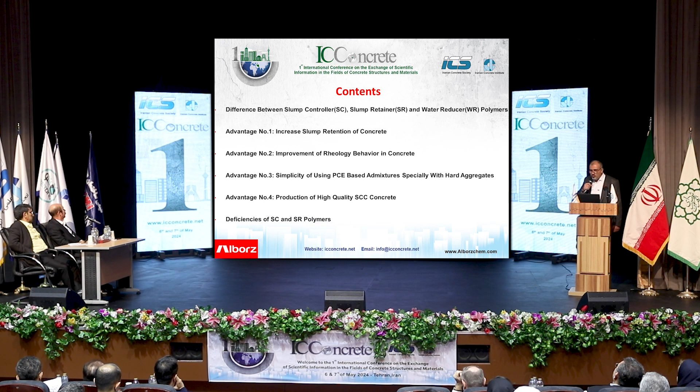Let's look at the contents of this presentation. First, we'll talk about the differences between slump controller, slump retainer, and water reducer polymers. We'll call these two polymers SR polymers from now on. After that, we'll discuss the advantages. Advantage one: increased slump retention of concrete. Advantage two: improvement of rheology behavior in concrete. Advantage three: simplicity of using PCE-based admixtures, especially with hard aggregates. Advantage four: production of high-quality SCC concrete. Finally, we'll talk about the deficiencies of SC and SR polymers and what we can do about them.

Before starting the subject, I would like to introduce our company, Alborz Chemie Asia. So I would like to ask you to watch this video clip.

Now we would like to talk about the differences between a slump controller, slump retainer, and water reducer polymer. First, the difference in dosage and performance of each polymer in concrete. You see from this figure, water reducer polymer has the minimum dosage or highest initial slump, but drastically loses slump over time. A slump controller polymer has a mean value slump, or a slightly higher dosage than water reducer. First you'll see an increase in slump, and after that, loss of slump. So finally, you see a polymer whose performance in slump retention is much better than water reducer polymers. And finally, slump retainer polymers have the maximum dosage or minimum initial slump, but the best performance in slump keeping of concrete.

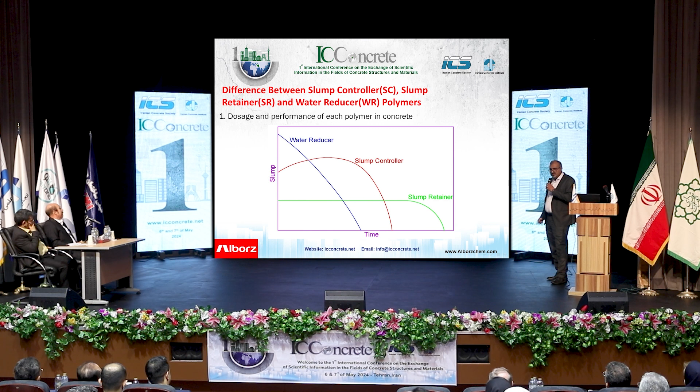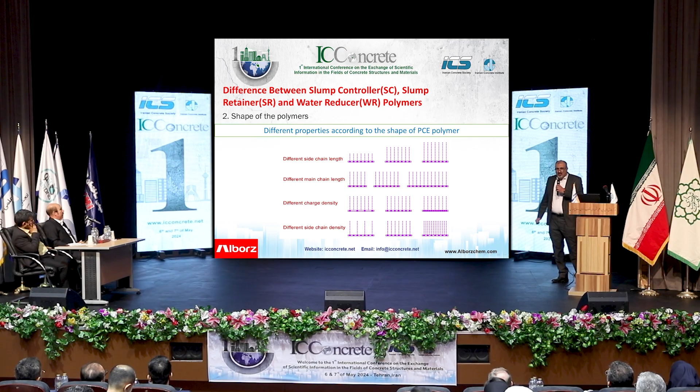Secondly, we'd like to talk about the shape of the polymers. We can give different properties according to the shape of the PCE polymer. PC polymer consists of a main chain and side chains. For example, here you can see different side chain lengths. This polymer, which has the longest side chain, gives the best slump keeping. With different main chain lengths: if you use a polymer with the shortest main chain length, you get the most water reduction rate at the start of concrete production. Here, the same shape but different charge density - the polymer with highest charge density gives the best water reduction at the start. And with different side chain density, the polymer with the highest side chain density gives the best slump keeping. So we can design a PC polymer to give special properties according to the shape of the polymers.

And by this usage, we can produce slump retention and slump controller polymers.

Okay, universal price and availability. About price, you can see there's not much difference between SR and WR polymers. But regarding mean value production amount, you'll see 70% water reducer and 30% slump retention in the world. In the market, you can find WR polymers as mother liquid for PC or PC base. So the most production in the world is water reducer, with 70%. But here, by using the advantages of SR polymers, we would like to encourage you to use more slump retention types.

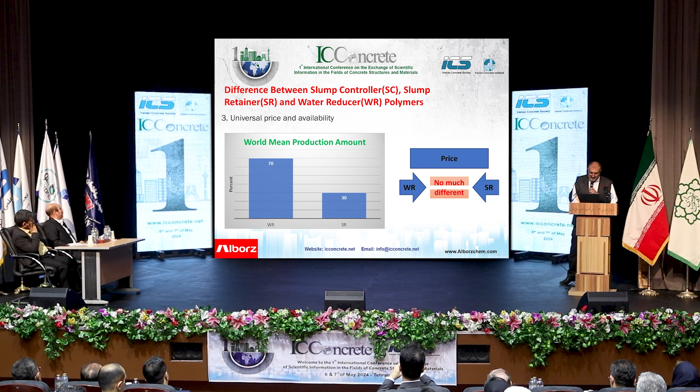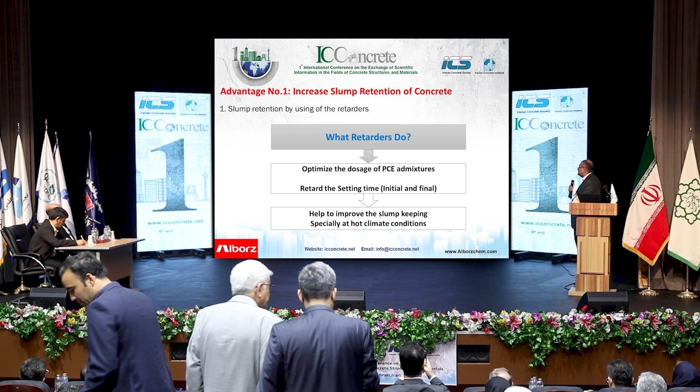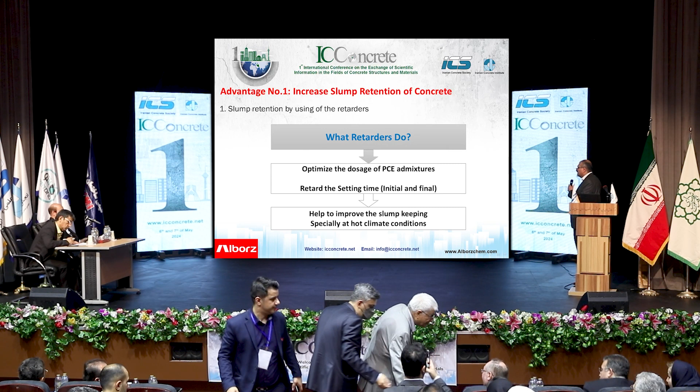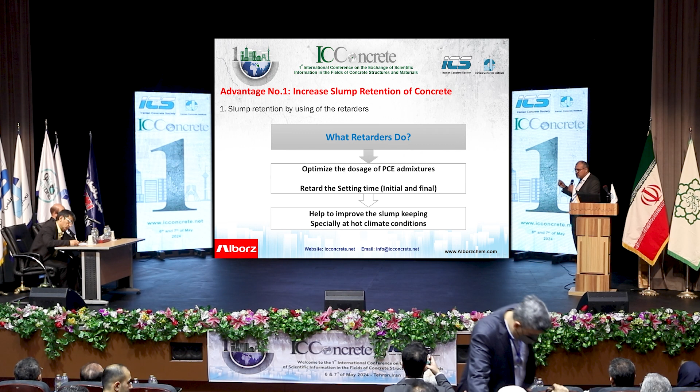Advantage number one: increase slump retention of concrete. First, by using retarders, we can improve the slump retention of concrete. Now, what do retarders do? First, they optimize the dosage of PCE admixture. If you use retarders beside the PC admixture in the formulation of a superplasticizer, you'll see optimization of the dosage of superplasticizer. In fact, you can use a little less pure PC, which could be economical. Also, they retard the setting time, both initial and final, depending on the type of retarder used. So they can help improve slump keeping, especially in hot climate conditions. For hot climate conditions, it is necessary to use retarders in the formulation of PC superplasticizers because we should retard the setting time of concrete to give the best slump retention.

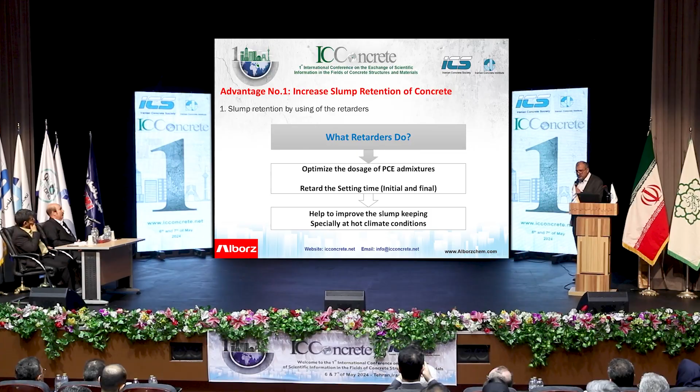But it's not enough. Now let's see what happens when you use retarders in the formulation of admixtures. Here you can see in this figure, we would like to control the initial setting time of cement at 90 minutes.

If the concrete temperature is 20 degrees, there is no need to use retarders to give an initial setting time of 90 minutes. If the concrete temperature rises to 25 degrees, we need 100 grams of pure retarder, not a solution of retarder, to give the initial setting time of 90 minutes. When the concrete temperature increases to 28 degrees, you will need 250 grams of pure retarder, more than 2 times as much.

And finally, if the concrete temperature is 35 degrees, you will need 600 grams of retarder. Now let's see what happens.

If you formulate a PCE admixture with 6% retarder, which is most common in the market, you can find PCE superplasticizers with 4 to 6% retarders, and here we use 6% retarder. So if you need 100 grams of retarder, you should use 1.7 kilograms of superplasticizer in 1 cubic meter of concrete. And finally, if you would like to use 600 grams of retarder, you should use 10 kilograms of PCE superplasticizer in 1 cubic meter of concrete.

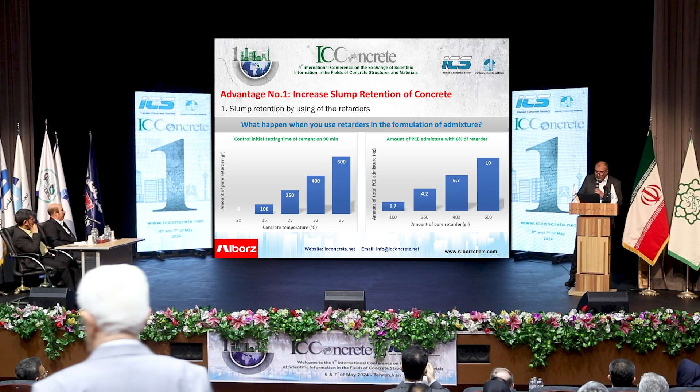So what happens here? If you would like to produce a concrete with a binder content of 450 kilograms per cubic meter and a target slump of 200 millimeters, here's what happens. If you would like to achieve this target slump with only 1.7 kilograms of admixture, you should use an admixture with a total solid content of 50%, with 44% being pure PCE.

And at the end, if you would like to use 10 kilograms of admixture to give a slump of 200 millimeters, you should use an admixture with a total solid content of 20%, with 14% pure PCE.

So when you use this type of admixture in concrete, you will put too much retarder in the concrete. So this type of admixture should be good for hot climate conditions, like the countries near the Persian Gulf, with hot and humid climate conditions.

And here, if you use this type of admixture, you will put a little amount of retarder in the concrete, and this type of admixture should be good for cold climate conditions. For countries like Iran, with hot summer and cold winter, maybe it is better to use these types of admixtures. So the formulation of admixture and the use of retarders depends on the project conditions and especially on climate conditions.

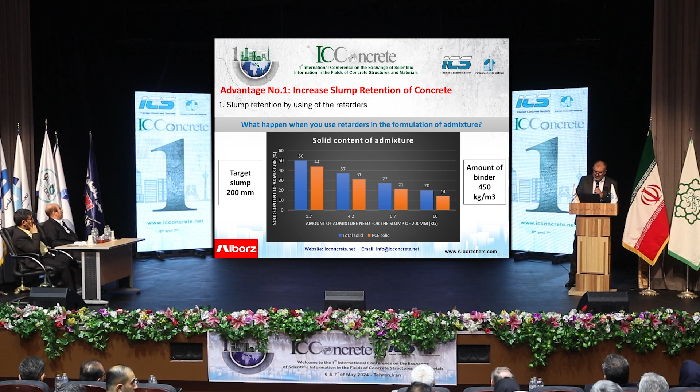And now we would like to improve slump retention by using these polymers. Here we don't use any retarder. If you formulate a PCE admixture and substitute about 50% of the water reducer polymer with SC and SR polymers, you can see here the sample admixture.

If you use only water reducer, after 45 minutes you will give a slump of about 80 millimeters. You cannot use this kind of concrete. But if you use this formulation, after 45 minutes the slump will be about 150. The concrete is usable.

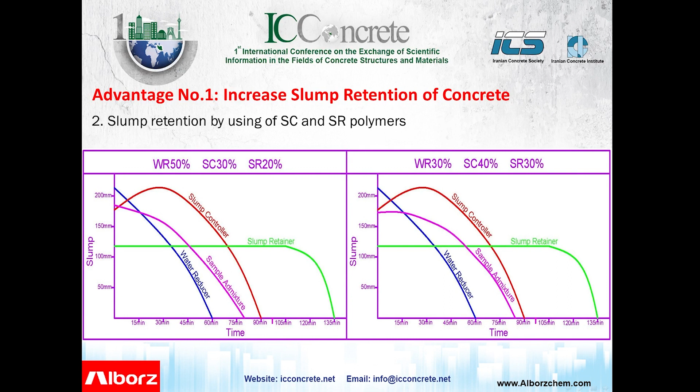And if you substitute more, about 70% of the formulation with SC and SR polymers, it is much better. After 45 minutes, you will get a slump of 170 without using any retarder. So using SC and SR polymers will improve slump retention much better than using retarders.

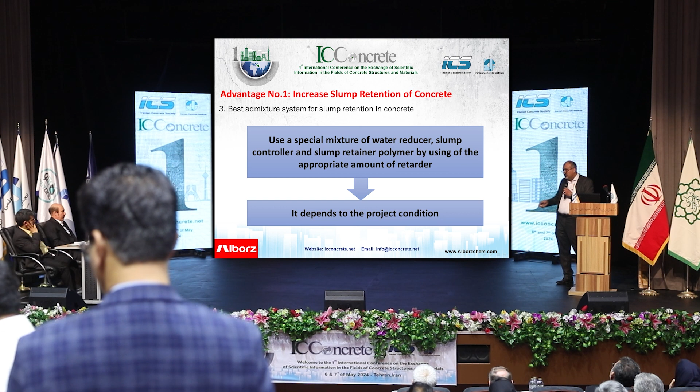And the best approach is to use a special mixture of water reducer, slump controller, and slump retainer polymer, with the appropriate amount of retarder. You should use retarders in the formulation of your admixture even at cold climate conditions. It depends on the project and climate conditions.

Now here you can see a video clip comparing two types of admixture produced by Alborz Chimie company. First, SRJ, which contains SR polymers, and second, HF, which contains water reducer plus retarder. You can see the performance of these two admixtures in concrete.

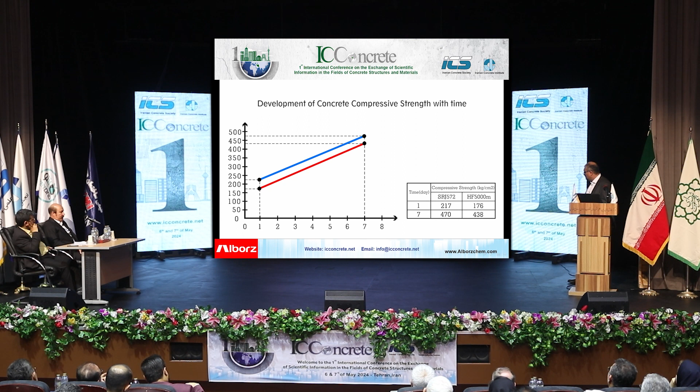Okay, now advantage number 2: improve the moving ability of concrete, as you saw in the clip. The best moving ability was for SRJ, which contains SR polymer.

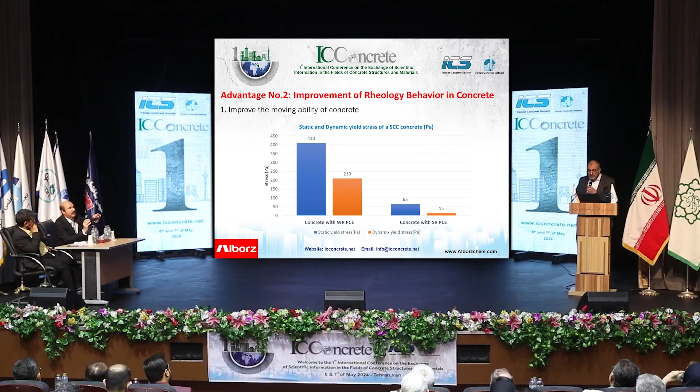Here you can see the static and dynamic yield stress of SCC concrete. This one is made with water reducer PCE, and this one is made with SR PCE. You can see here the much higher static and dynamic yield stress of SCC concrete made with water reducer polymer. So the moving ability of concrete made with SR is much better. Besides that, you can see here a decreased probability of segregation and bleeding when using SR polymers.

Because the viscosity of concrete produced with SR polymer is 18 compared to 13 for concrete made with water reducer, higher viscosity decreases the probability of segregation and bleeding. So finally, we can say there is improvement of rheology behavior in concrete by using SR polymers.

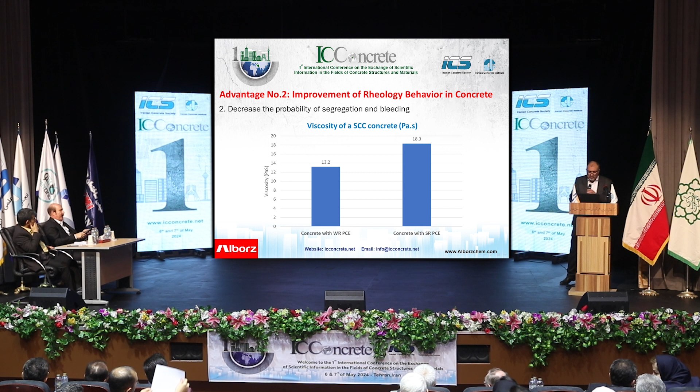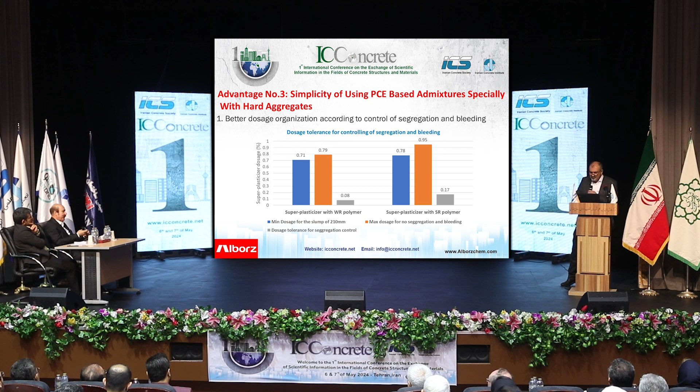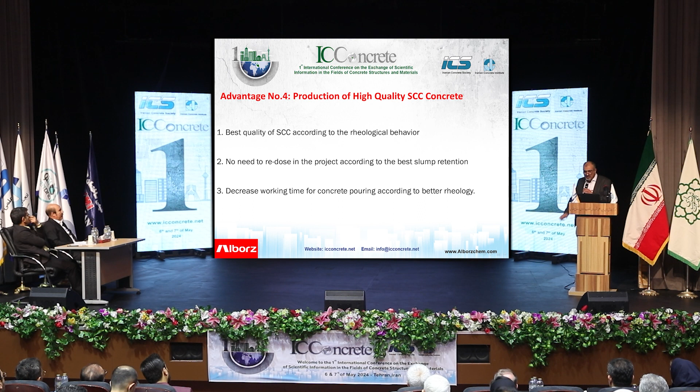Finally, advantage number 4: production of high quality SCC concrete. First, best quality of SCC according to the rheological behavior shown before. Second, no need to redose in projects according to the best slump retention of admixtures produced by SR polymer. And finally, decreased working time for concrete pouring according to better rheology. You can see this in this video clip.

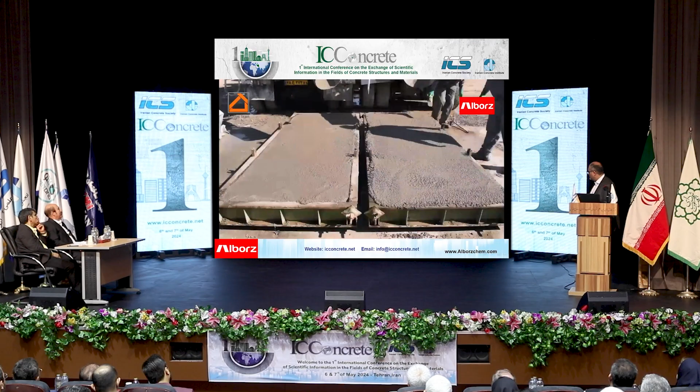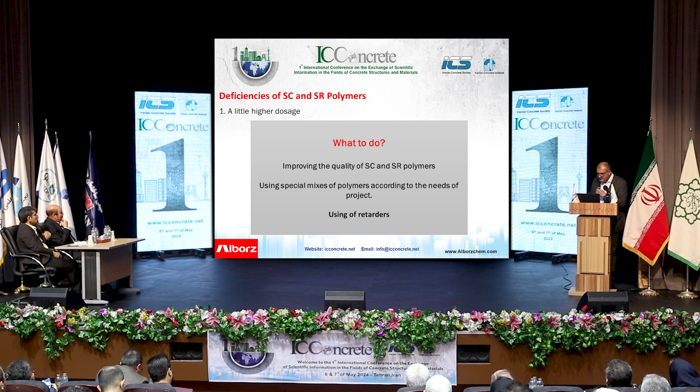Second, different technology for production needs higher accuracy and more quality control. What can we do? Buy from a trustable company.